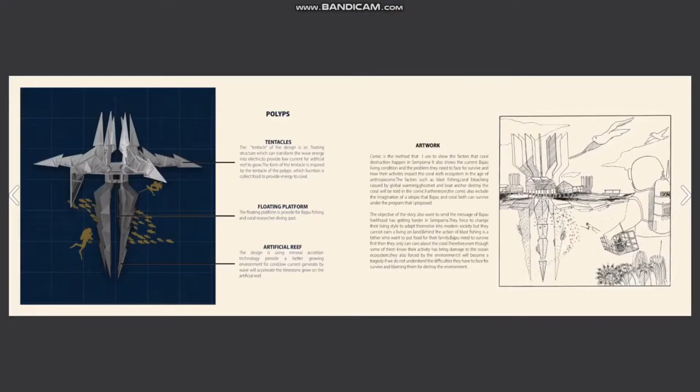The artwork for my Project 2 is a series of comics about the Bajau's current living conditions and the problems they face to survive, and how their activities impact the coral reef. The story begins with a Bajau man fishing in the sea, trying to find food for his family. Suddenly, he gets killed by blast fishing activities, and the coral is also destroyed by blast fishing.

When his son grows up, he becomes a coral researcher, trying to save the coral from coral bleaching through a coral restoration program. He also sees that fishing activities had destroyed the coral's living environment, such as boat anchors and ghost nets impacting coral growth.

This is the coral triangle made by my proposal, protecting the coral from fishing activities. This is the imagination of Bajau and coral both being able to survive under the program that I propose.

The design intention for my Project 3 building is the same as Project 2, which is to restore coral and rebalance the coral ecosystem.

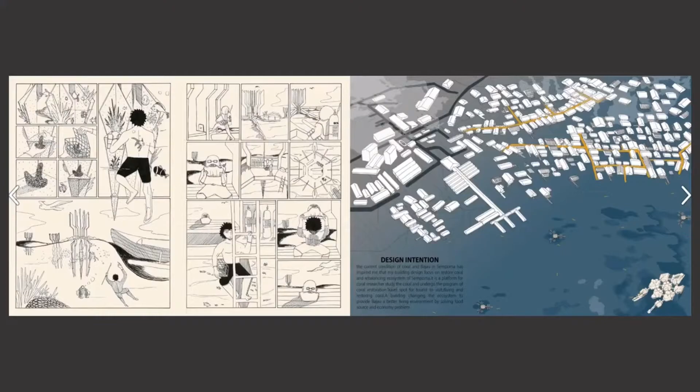The program of my proposal is having a coral farm at the near-shore area for the Bajau to grow coral and sell it to earn money instead of illegal coral mining. The main program of the building is coral restoration, which helps restore coral on the artificial reef, providing a better growing environment for coral.

Researchers use the lab to find the best way to help coral against global warming. Tourists take part in this program, which helps share the message of coral with people and increases the income of this area. The design concept of my building form is studied from the skeleton of coral, the corallite.

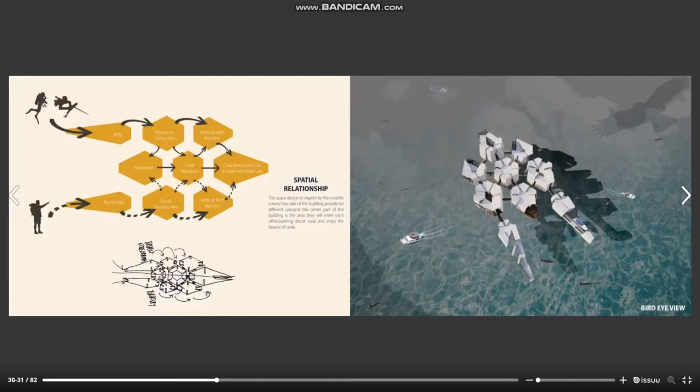It is the base which supports coral growing, representing the coral reef as the skeleton of the Semporna area, supporting the ecosystem and Bajau livelihood. This is my spatial relationship: Bajau and coral researchers mainly use this area, and tourists mainly use this area. This is the form of my buildings.

My building is 700 meters from the Kampung Bangau-Bangau jetty, and the sea level depth of this area is more than 5 meters, suitable for scuba diving activities.

This is the near-shore coral farm. The building uses a pontoon structure to support it floating on the sea. Thatch and timber are the materials used to construct this building. They are located surrounding the near-shore area of Kampung Bangau-Bangau. Bajau grow coral in the artificial reef surrounding the building under the shallow seawater.

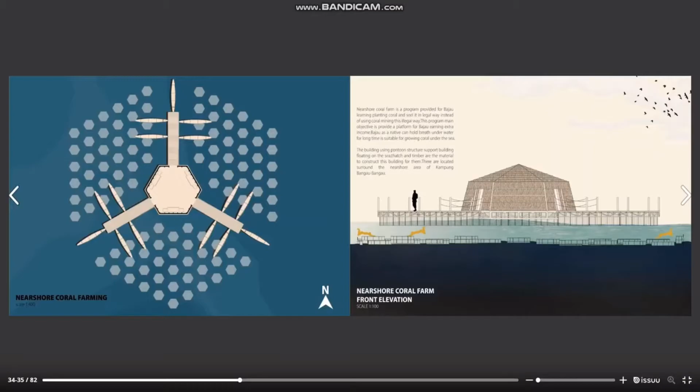These are the plans of my main building. This is the tourist jetty; there is a lounge area for tourists waiting to check in to the hotel, and a restaurant with an outdoor open area where people can enjoy their meal with the sunlight and scenery. There is a coral aquarium for tourists to learn about coral and enjoy its beauty.

There is a hydraulic pump controlled elevator which can lift people down into the sea. Tourists can see the undersea view and the coral growing on the artificial reef under the building.

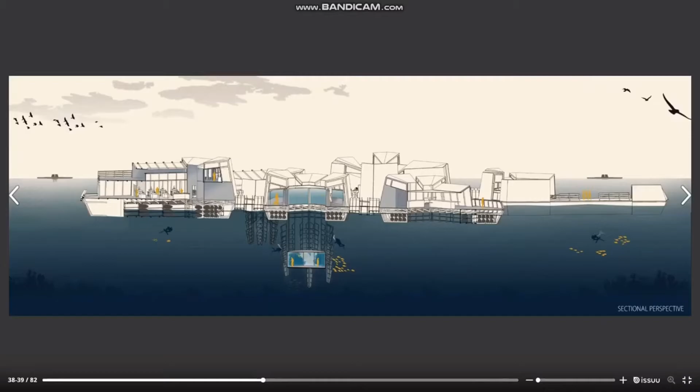The coral restoration lab is for tourists to experience the coral restoration program, and it's also used to produce coral by coral fragmentation. There is an experiment reef lab on the first floor for researchers to study coral, finding the best way to save them from coral bleaching.

The artificial reef machine is a part of my building located on both sides of the coral restoration lab. Its main function is to provide a better place for coral to grow under the sea.

The coral will grow on the steel-made artificial reef until it can grow well in nature. The artificial reef machine will detach from the main building, and a tugboat will pull it to the specific location.

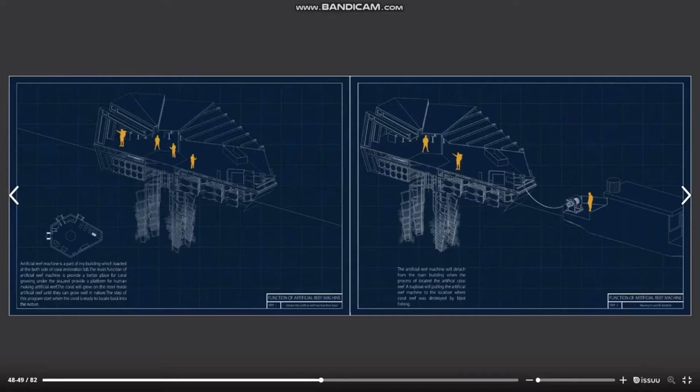When the artificial reef machine reaches the specific area, the extended floor will provide space for people, making the base for locating the artificial reef.

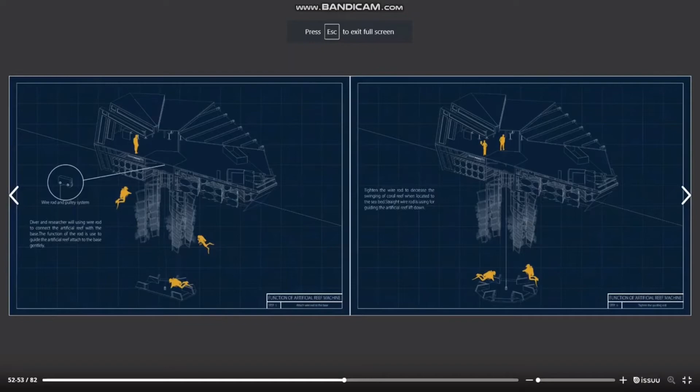Divers and researchers will use a wire rod to connect the artificial reef with the base. The artificial reef will detach from the artificial reef machine, and a pulley system is used to slowly lift down the artificial reef and connect it to the base.

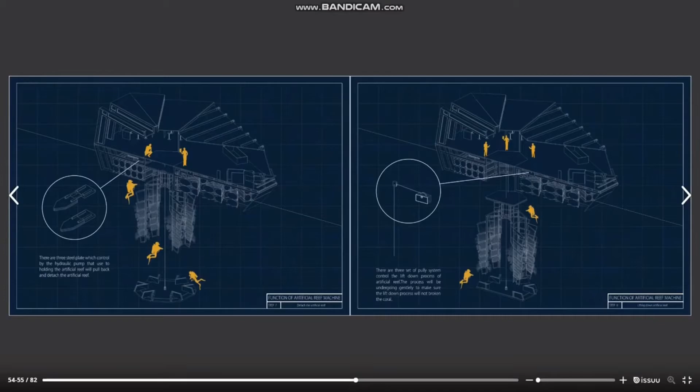The artificial reef will fit into the slot of the base and stay still on the seabed. Therefore, coral will attach back to nature after the coral restoration program.

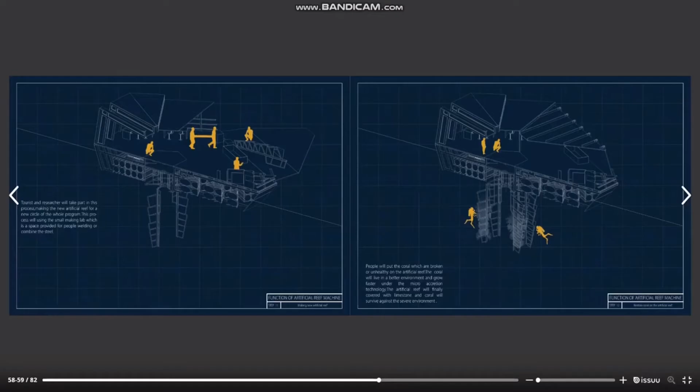Tourists and researchers will use the platform to make a new artificial reef and restore coral on it again. Steel is the main material used to construct my main building, and a drag anchor is used to tether my building to the seabed.

The balance between coral and Bajau will reach equilibrium.

And now I'm going to show the walkthrough of my building. The tourist jetty is specially designed for tourists, with a lounge in the middle for people resting while waiting to check in or check out.

The tourist hotel has a beautiful scenery view in the room. It connects to the coral aquarium for people to enjoy the beauty of coral.

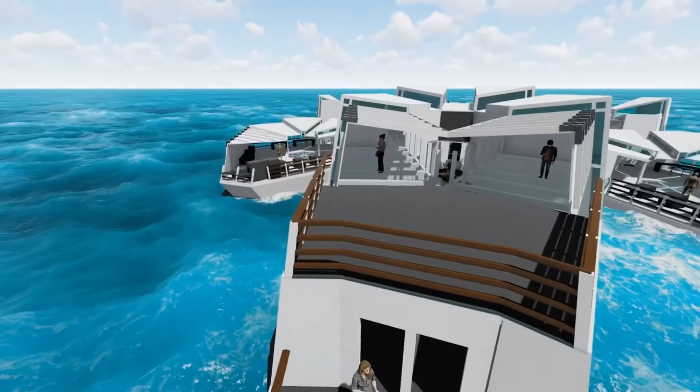And then there's the coral restoration lab, where tourists learn about coral restoration at this area, with a glass floor for people to watch the coral restoration process from the first floor.

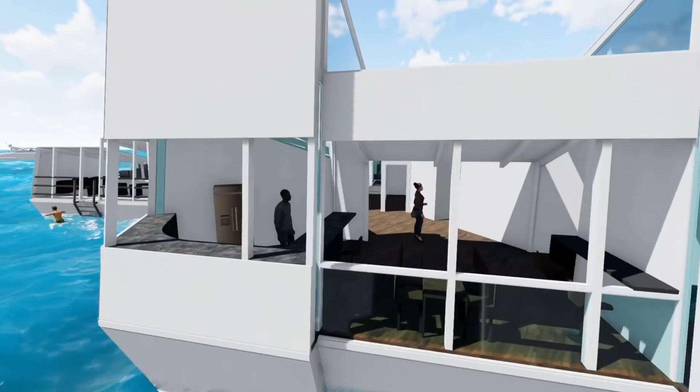And this is the artificial reef machine, a platform for people to make artificial reefs, and this is the researcher living area, which connects to the restaurant where people can enjoy a meal with beautiful scenery.